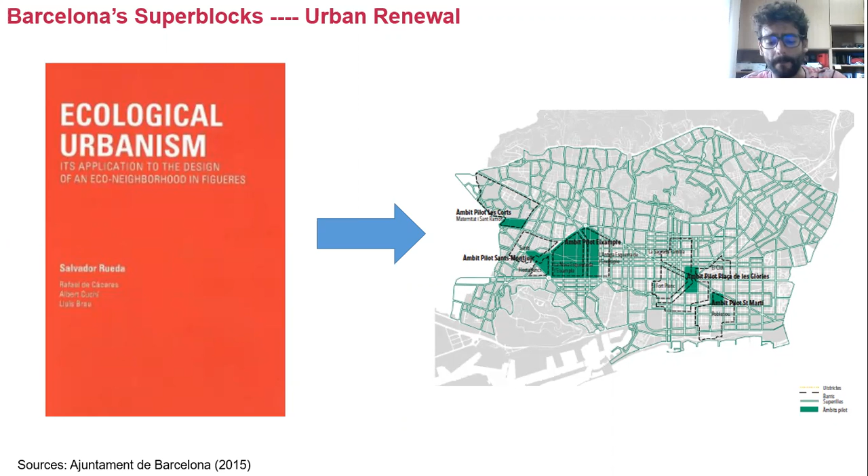The experiment of superblocks is applied in different ways depending on the city's morphologies. One is the 19th century Eixample extension, set up by 550 identical square blocks of 113.3 meters per side in an orthogonal grid of identical 20-meter wide streets, with exceptions of two diagonals and minor streets. This case regards the grouping of 9 square-shaped blocks, which results in a standardized 400-meter urban cell each, with 5,000 or 6,000 inhabitants. Superblocks include public open spaces such as streets, sidewalks, and at least a square.

Up to mid-2021, actions have been implemented in just 6 neighborhood units, but the City Council has recently accelerated these measures. The launching of a competition in late 2020 started a process that will end in 2033 to reconvert most of Barcelona's Eixample into a great superblock.

Supported by public expenditure of around 40 million euros, the area will be divided into 21 green hubs and 21 squares, providing more than 33 hectares of pedestrian areas and more than 6.5 hectares of urban green space. This will mean that 1 in every 3 streets will become a green hub, and that each resident will have one of these green hubs or squares no more than 200 meters from their home.

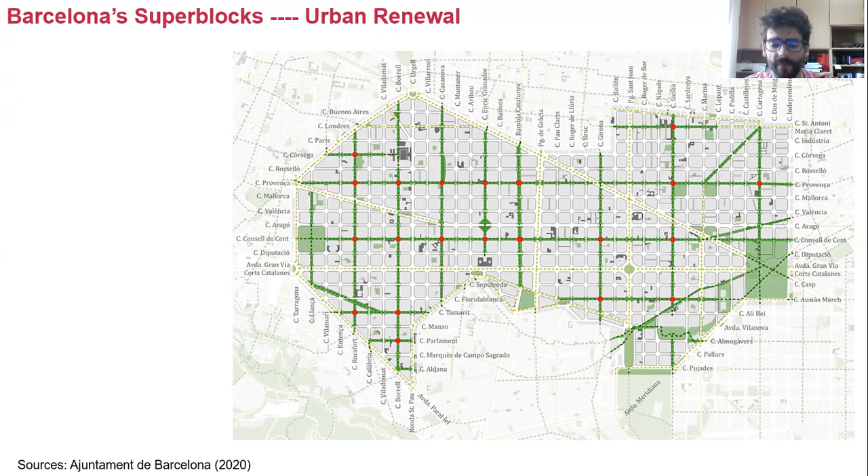By taking into account the implementation of the first 2 superblocks carried out in Poblenou and Sant Antoni neighborhoods, the governance of the urban renewal project basically concerns 3 main features. First, superblocks require considerable budget availability to expand them across the entire city due to the high cost of implementation. The first superblock in Poblenou cost 3.5 million euros, while the amount spent for the Sant Antoni neighborhood unit raised up to 8 million euros.

Second, the lack of open debates with citizens in Poblenou caused protests against the poor involvement of local residents. The launching of successive superblocks, such as the Sant Antoni one, have been accompanied by open debates with citizens.

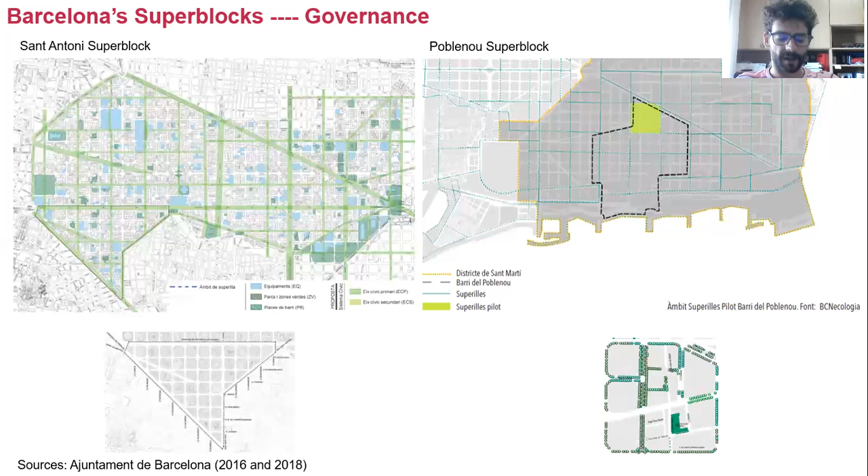Thirdly, the overlapping of the Poblenou unit onto the existing urban built environment implied two types of issues. The mobility system showed incoherence when it changed traffic flows without implementing changes across the whole system, and bicycle lanes were not fully reallocated, generating conflicts between pedestrians and cyclists. Moreover, no underground parking replaced the removed parking lots.

The impact of superblocks will be relevant in the sector of private motorized transport, resulting in better air quality and less urban noise, preventing more than 660 premature deaths. Green surface would increase drastically, and the current heat island effect in a 343 block would drop by more than 35%, while public green spaces, block interiors, patios, and green surface would increase by 35% too.

Nevertheless, upgrading the quality of citizens' life in superblocks implies the risk that rents inside the neighborhood units may rise, and long-term residents may consequently be forced out. Poblenou and Sant Antoni superblocks' market values seemingly follow average real estate trends, not affected by the superblock-operated change. In addition, in September 2020, the Catalan Parliament passed a law regulating rent prices on new housing contracts, approved in December 2020, to guarantee accessibility in 60 Catalan municipalities, including Barcelona.

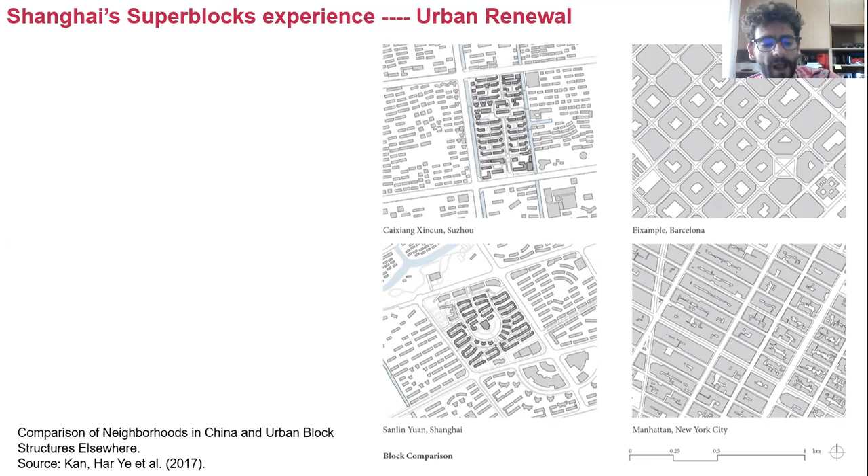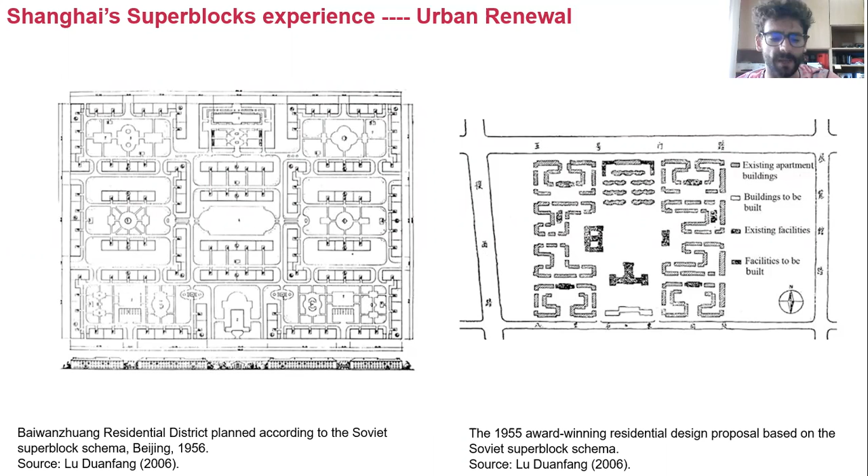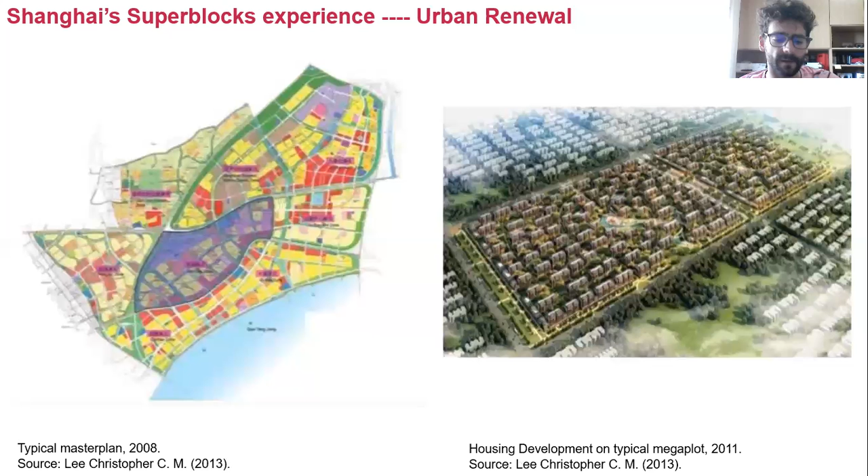Superblocks can be seen as the evolution of Chinese housing neighborhood constructions since the proclamation of the People's Republic of China onwards, where the first urban schemes were imported from Soviet models. The main concept behind superblocks is that urban planning provides a zoning scheme, and then developers build the residential compound in the form of a gated community, basically isolated from the outside.

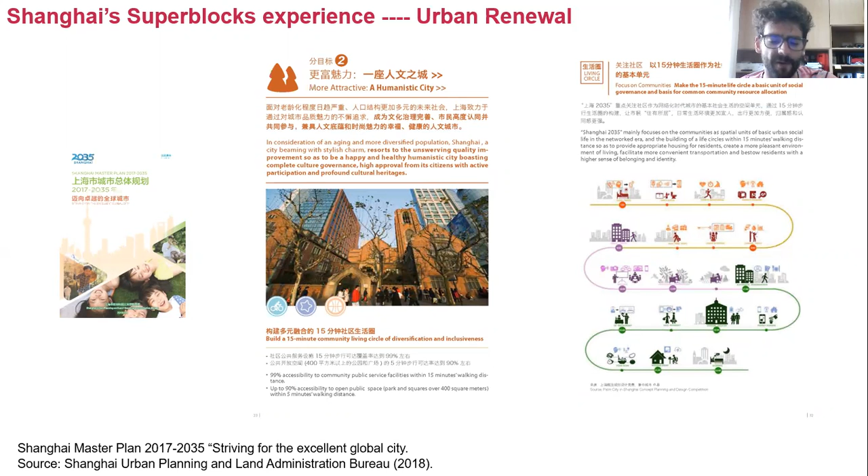Shanghai is implementing the Shanghai Master Plan 2017-2035, striving for the excellent global city. One characteristic of the master plan is to enhance everyday livability by realizing a human-scale built environment. The life circle concept, also named 15-minute city, permeates Shanghai's developmental agenda.

The master plan for 2035 portrays a scenario in which Shanghai will drastically increase the presence of public space across the city, providing parks and squares covering over 400 square meters within 5 minutes walking distance, furnishing inhabitants with at least 4 square meters of community public space per capita, distributing 99% of public facilities within 15-minute city walking distance in communities, and reducing to 2.5 kilometers the average travel distance for daily life needs.

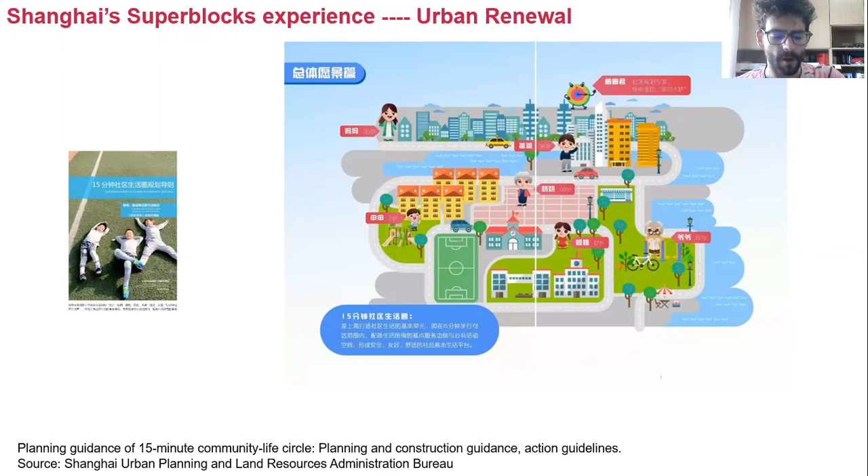In 2016, a guideline manual was released by the Urban Planning and Land Resources Administration Bureau. The most important aspects emerging from this document are two. On the one hand, we find the attempt of defining a benchmark for the 15-minute community-life circle construction as part of a broader urban renewal action. On the other hand, we read the government's will to engage communities from below, promoting grassroots participation.

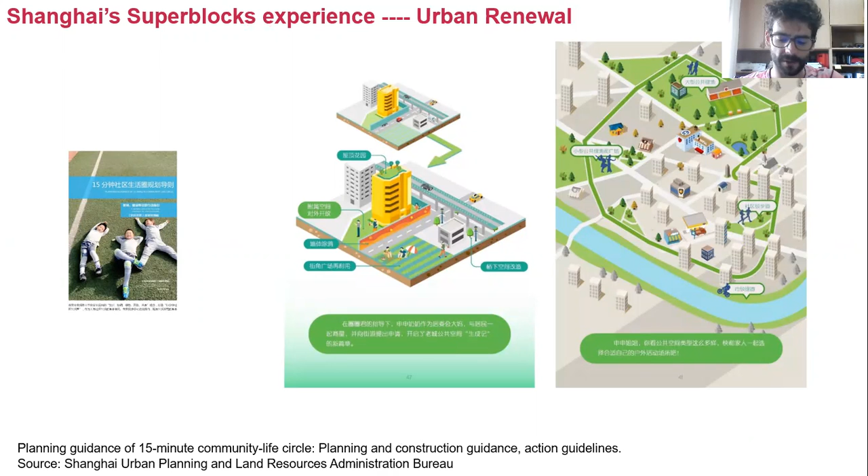Both factors entwine inextricably with Chinese superblock strategy approach to city making, questioning, for instance, the relations materializing between neighborhood supersizing and communities accommodation.

Some criticalities already emerged. For instance, in Guangzhou, a local researcher Zhu found that implementation is imposed with excessive uniformity regardless of local differences. The principal reason lies in the special characteristic of housing compounds that substantially repeat ubiquitously and generate homogeneous urban environments. Superblocks made cities like Shanghai result in a fluid public urban form where the human scale becomes approachable within the scale of megaplots, which host gated housing communities.

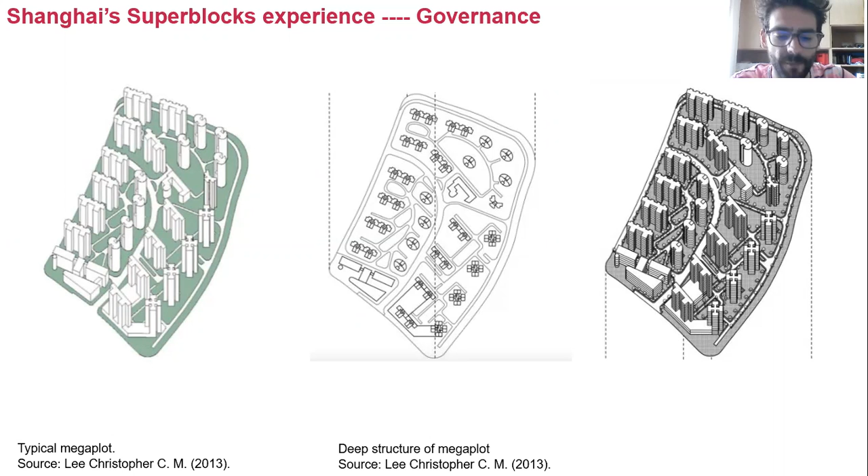The standard implementation, barely altered by local and circumstantial variations, consists of a simple sequence of actions. The government, who owns the land, sells the use rights to developers who in turn build and sell the dwelling units to inhabitants. This is an example of a generic superblock where we can recognize the planning rationale, that is the maximization of housing surface facing south, playing with buildings disposition and distancing.

The last two decades of urban planning generated undoubtedly positive effects on Shanghai's city life if considered from a general perspective. Urban renewal practices regenerated the city and its socio-economic fabric, as we can see in these two scales, for instance. Two symbolic data measured over the previous ten years synthetically portray its transformation trajectory.

On the one side, urban green spaces decisively grew, passing from 120,000 to approximately 160,000 hectares in 2019. On the other side, investments in real estate development more than doubled, shifting from approximately 2,000 million yuan in 2010 to 4.2 thousand million yuan in 2019.

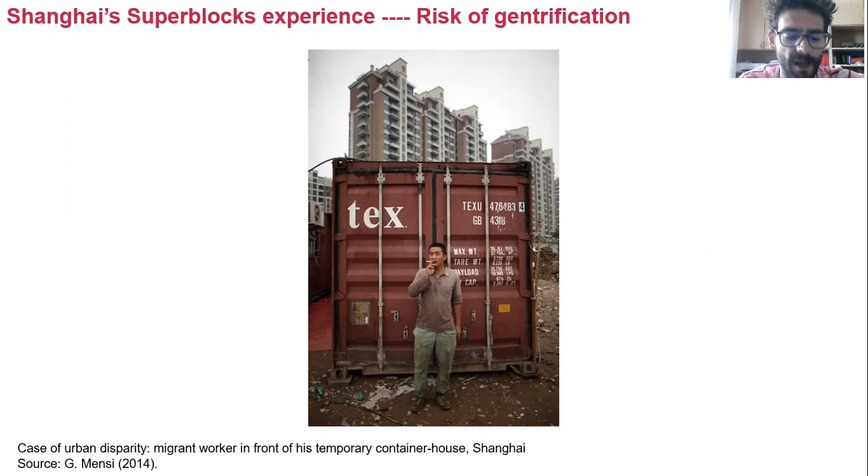However, the impressive numbers of the real estate industry are coupled with housing problems for a large slice of the population, mainly the migrant workers. The economic shift started with the open doors policy, which introduced capitalistic mechanisms on the statal stewardship of urban land, turning the housing industry into speculative real estate activities.

Forbes reports, for instance, that some neighborhoods in Shanghai have risen prices by 40% in the last 5 years. Gentrification and speculation are two reasons why Shanghai Master Plan 2017-2035 set the goal of realizing at least 8% or 10% of housing dedicated to low rent housing, public rental housing, common property rights housing, and resettlement housing.

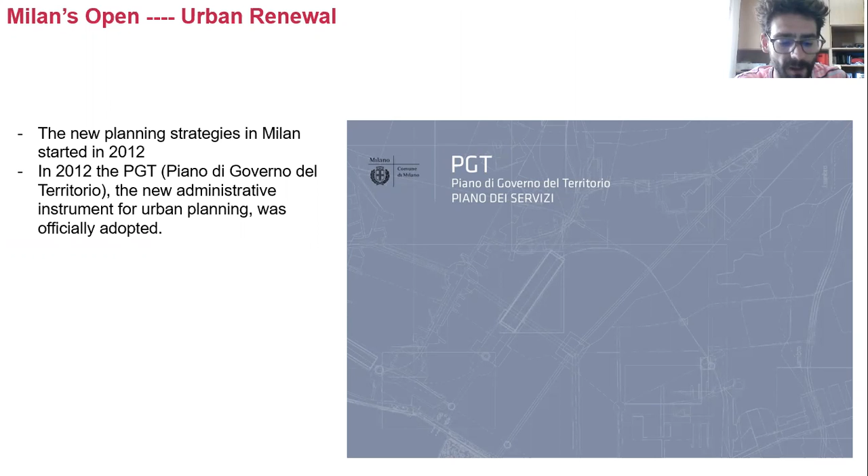The third case study is Milan. Milanese response to the COVID-19 pandemic in the urban planning field has its roots in something that was already happening since 2012. In 2012, the new urban planning instruments focused on the improvement of the quality of life, availability of services, and public area and accessibility to them.

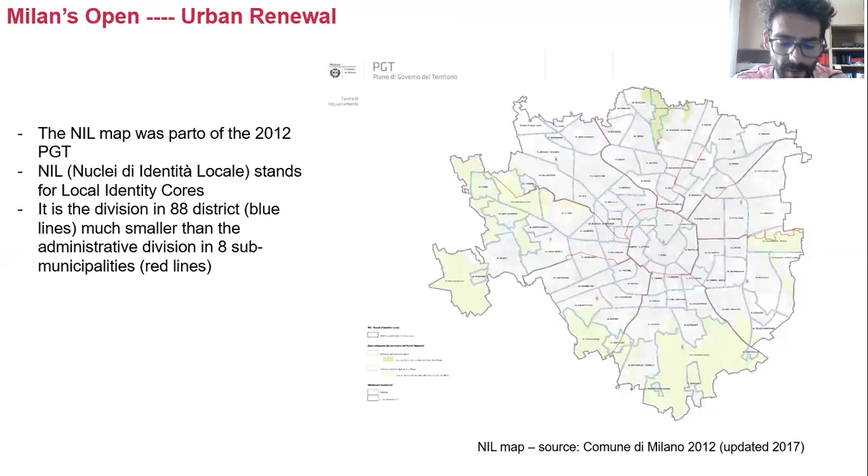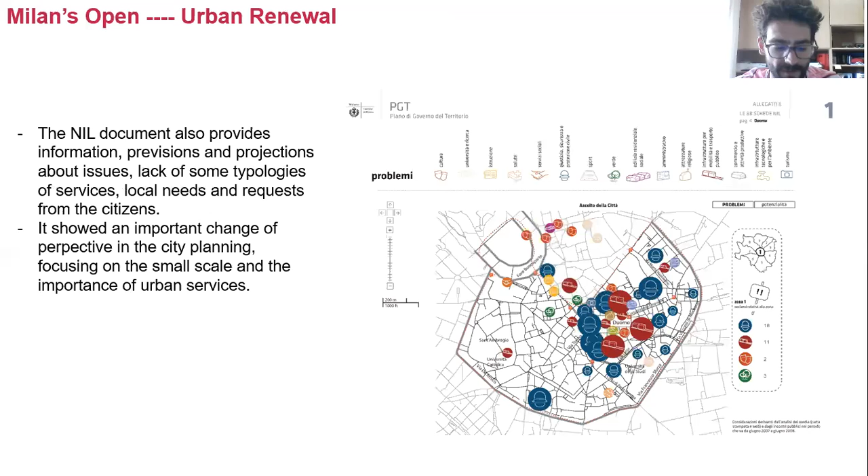In that urban instrument, as an attachment to the plan of services, appeared a new city district division, different from the administrative division in 8 sub-municipalities. This new division, called NIL mapping, which stands for Local Identity Cores, was based on the identification of small local identities, showing demographic data, existing and missing services to be planned, as shown in the current diagrams.

Later, in 2018, there was the launching of the neighborhood plan, in Italian Piano Quartieri, aimed to allocate resources to small-scale local interventions directly requested by the citizens. The neighborhood plan included the Open Squares program, in Italian Piazze Aperte, developed in collaboration with Bloomberg Associates, NACTO, and Global Designing Cities Initiative.

Among the members of the NACTO board was Janette Sadik-Khan, former commissioner of the New York City Department of Transportation from 2007 to 2013, when the well-known process of pedestrianization in Times Square happened.

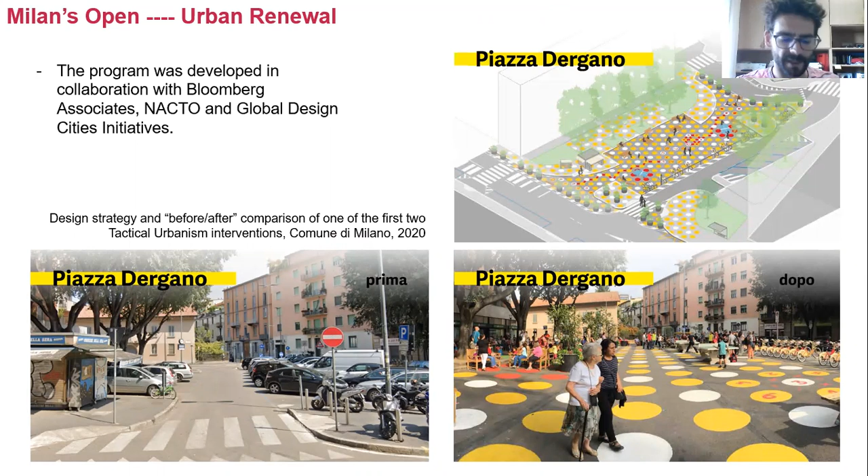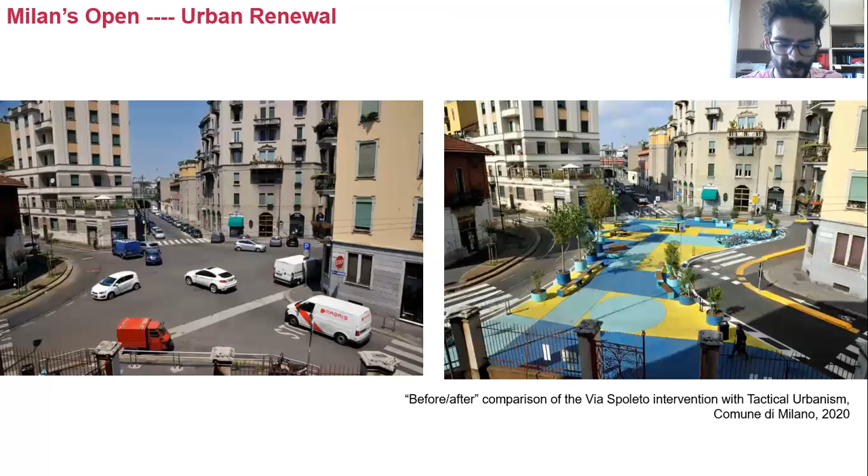The Piazze Aperte program aimed to create cheap, fast, and diffused micro-interventions to build a dense network of public open areas, ready-made using the tools of tactical urbanism. They were also an occasion to experiment with slow and sustainable urban mobility solutions, with the creation of temporary and adjustable bicycle lanes.

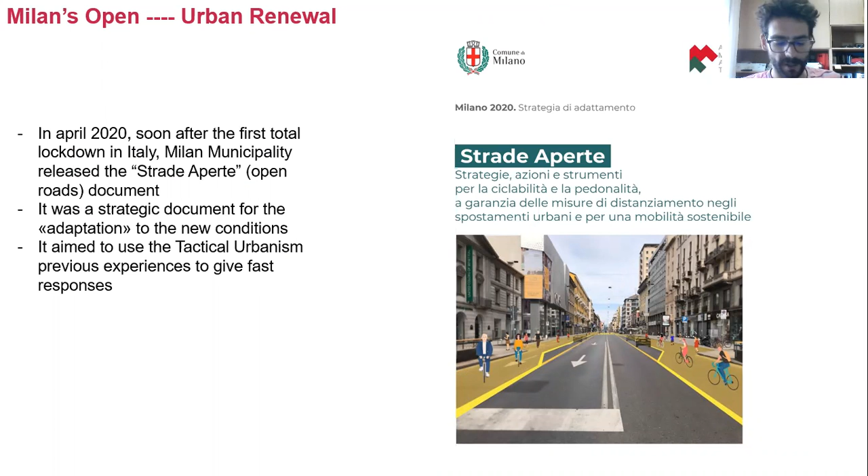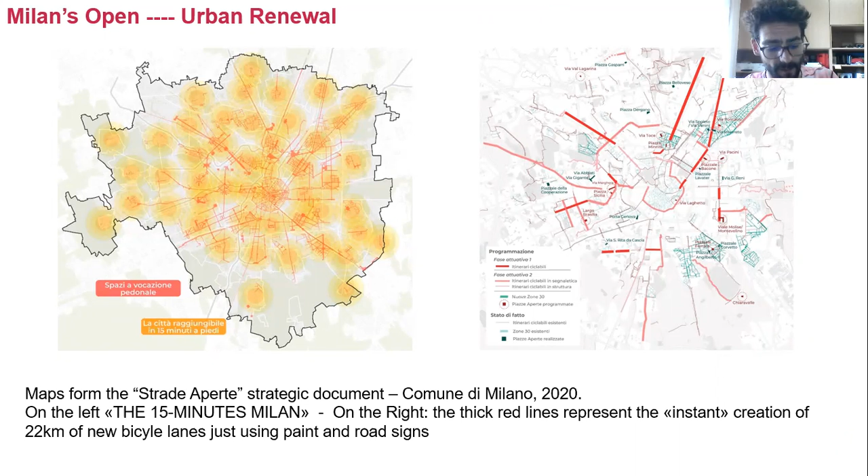When the pandemic happened, Milan City Council produced a strategic document called Open Roads, Strade Aperte, using previous experiences as a response to the pandemic outbreak. The document expressly mentioned the Paris 15-minute city, tactical urbanism, and Barcelona Superblocks as references.

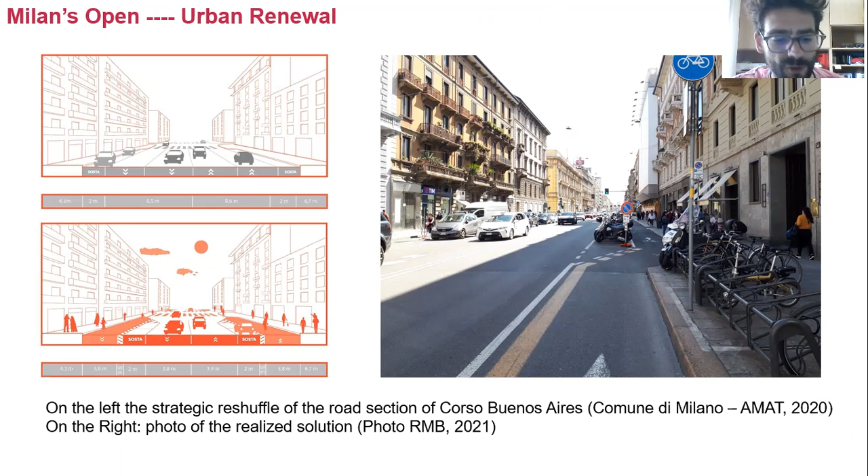This led to the creation of 22 new kilometers of cycling paths, with provision to reach 35 by the end of 2020, using painted road signs and the reshuffle of existing road sections.

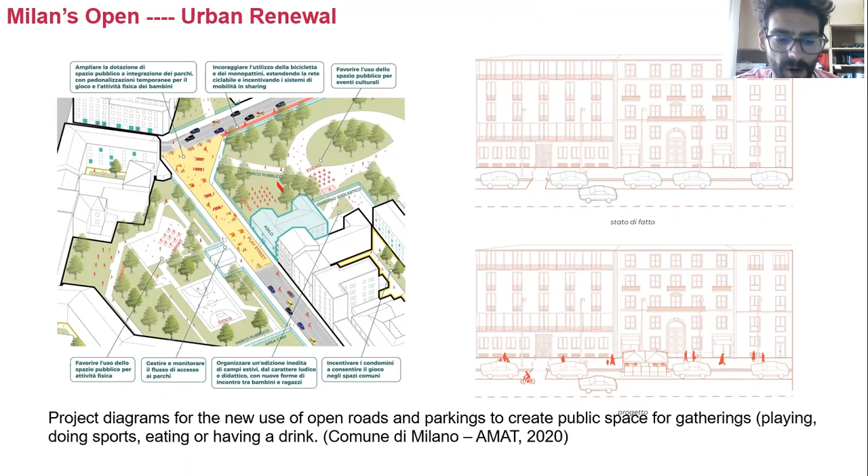Economy, time, flexibility, and radical choice are the keywords of tactical urbanism interventions in Milan, but some possible side effects are to be considered. The light and soft interventions could be fast decaying and need resources to be transformed into something permanent, or they will become just an operation of postponing the issues.

In second place, even if there are many options for urban mobility, the process of dismantling private cars is far from being reached. Traffic and parking issues should be considered and monitored.